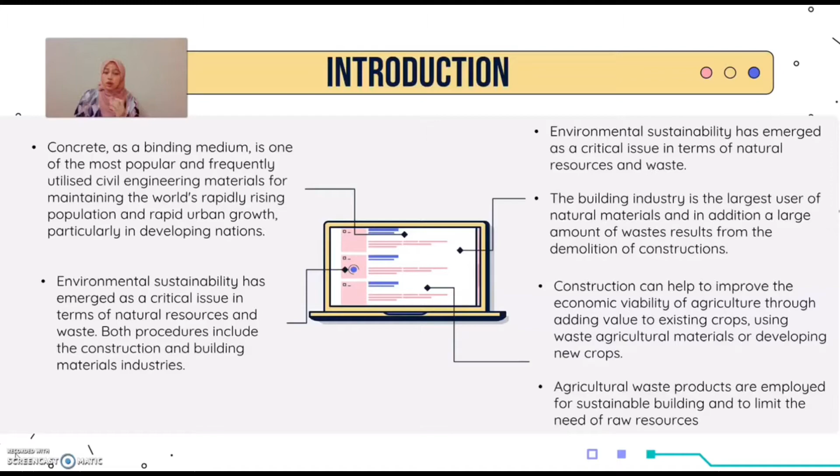The building industry is the largest user of natural materials, and in addition, a large amount of waste results from the demolition of constructions. Thus, construction can help to improve the economic viability of agriculture through adding value to existing crops using waste agriculture materials, or even developing new crops.

Kaur 2017 said that wheat straw is organic waste that is not easy to dispose, and the easy way to decompose this waste is by burning it. Memon 2021 stated that several researchers have undertaken to save natural fine aggregate by replacing it with agricultural waste ash like wheat straw ash.

Binici 2008 said that increasing the addition of agriculture ash such as corncob ash or wheat straw ash can increase 2 until 6% weight of fine aggregate, and it can increase the quality of the concrete.

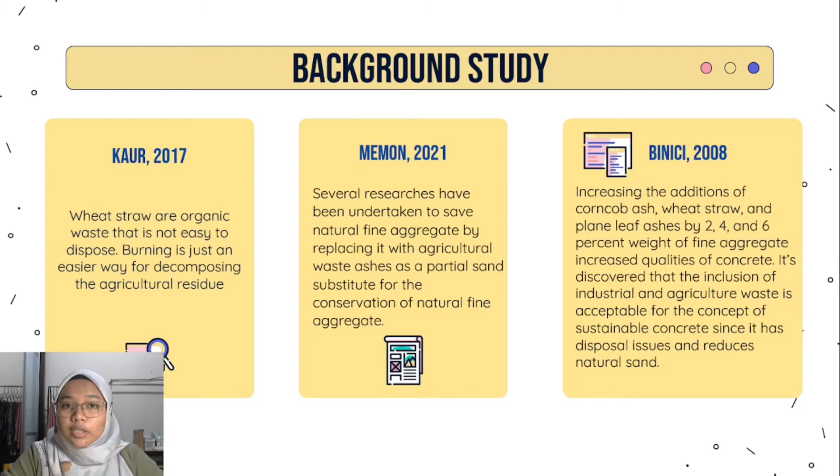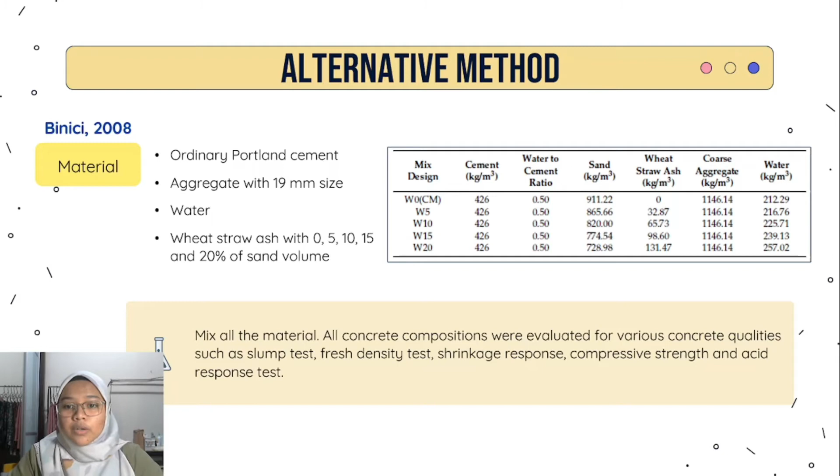The concrete composition will be evaluated for various concrete qualities such as a slump test, fresh density test, shrinkage response, compressive strength, and acid response test.

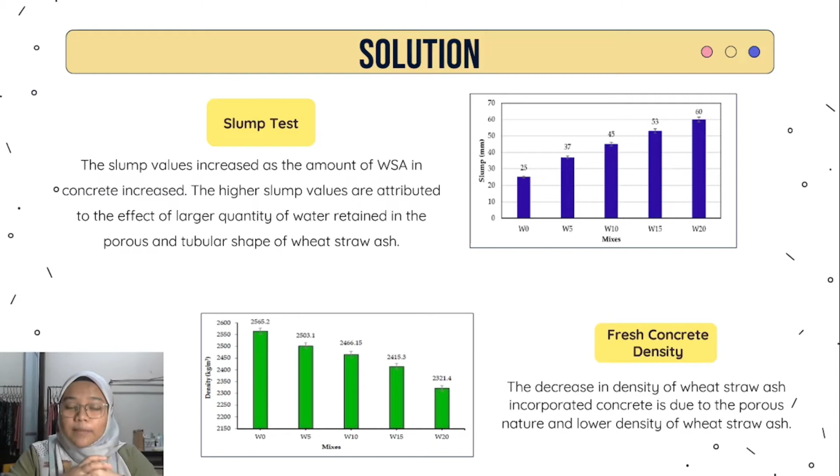We move to solution, which is all about the results that we chose from the journal. For the slump test, shown in the histogram graph, the slump value increased as the amount of WSA in concrete increased. This is due to the effect of a larger quantity of water that is retained in the porous and tubular shape of wheat straw ash.

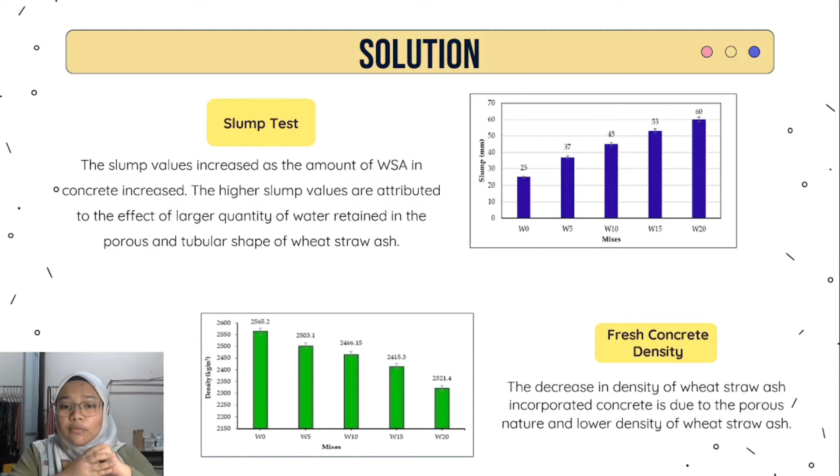For concrete fresh density, the decrease in density of wheat straw ash incorporated concrete is due to the effect of the porous nature and lower density of wheat straw ash.

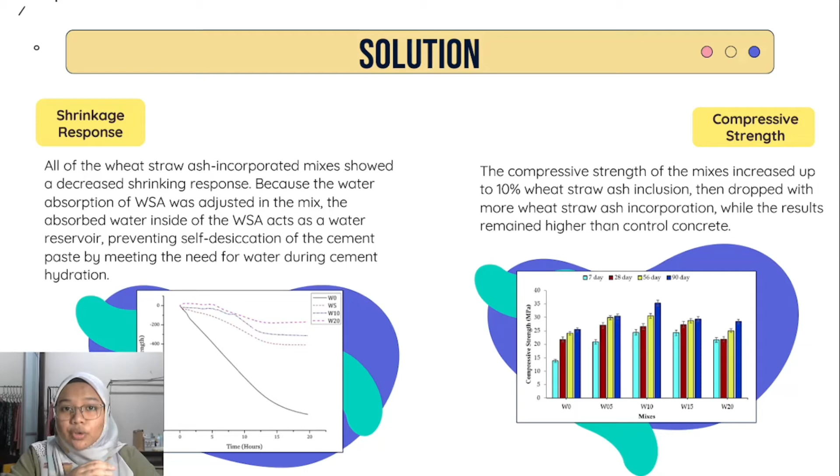For the last testing result, which is the acid response test, with a higher replacement percentage, weight loss is decreased in sulfuric and hydrochloric acid. As previously stated, the water absorption of concrete at any given age decreased as the amount of fine aggregate replaced with WSA increased.

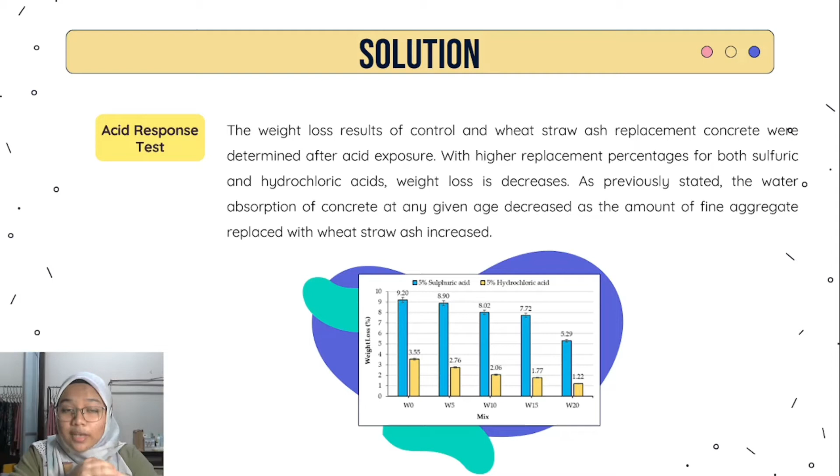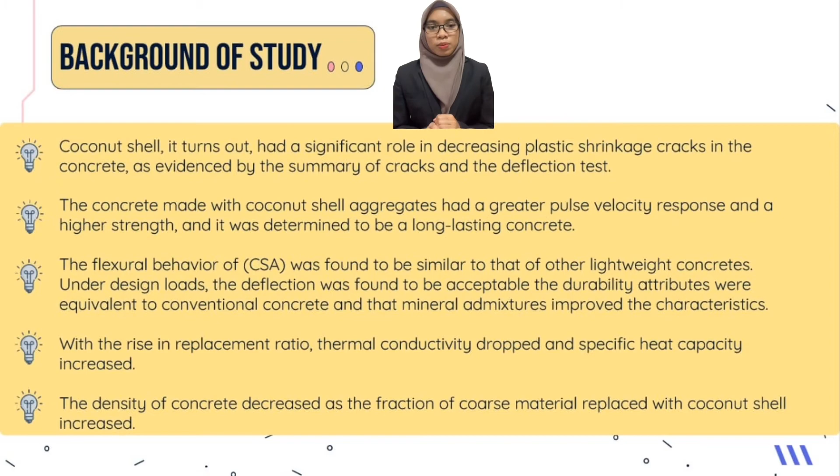Materials for this method are cement, water, aggregates, and coconut shell, with the coconut shell varying in percentages like 0%, 5%, 10%, 15%, 20%, 25%, and 30%. So the materials are all mixed.